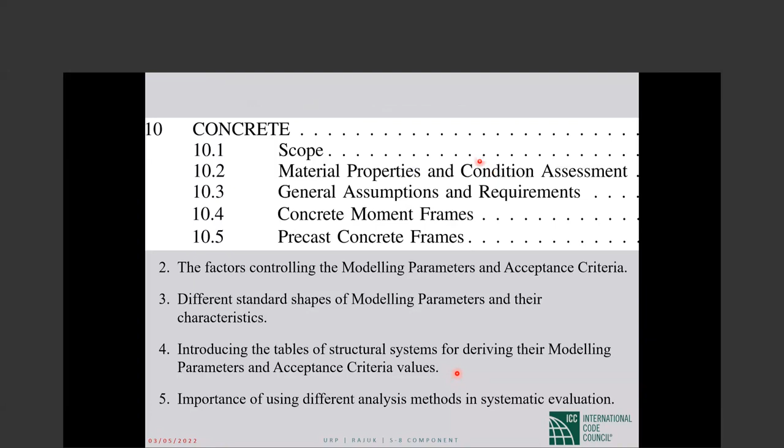Look at this systematic existing building code: performance levels, a chapter on the definition of hazard levels, a chapter on different analysis methods, linear method, nonlinear method, and then some chapters on different materials.

So all the information regarding the different systems that are made from that material is usually very nicely summarized in the chapters related to that material.

For example, for concrete, and the same for almost all materials, we have the scope at the beginning, material properties and condition assessment second, general assumptions and requirements third. So these three are general things.

And then we go to the systems, which is, for example, concrete moment frame is a system, precast concrete frame is a system, concrete frames with infills are a system, concrete structural walls and precast concrete structural walls, concrete braced frames, and then some elements: cast-in-place concrete diaphragms, precast concrete diaphragms, and concrete foundation.

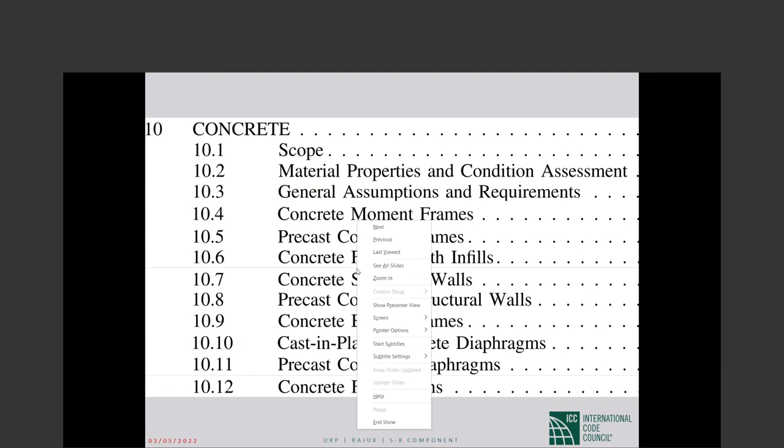Therefore, as a sample, we look at the structure of the concrete section. In the first part, the scope part, it naturally tells us some general statements about the area that is covered by this section, by this chapter.

For example, it cautions us that this chapter is not for damaged reinforced concrete buildings in an earthquake. So it's for existing buildings that have not experienced, or have very small, but not lots of, damage from earthquake.

If we want to evaluate a damaged building, the procedure should be somehow different. So in scope, it emphasizes in what conditions we can use the requirements of this chapter for our existing building.

Then there is the second part in each chapter: the material properties and condition assessment, which is really the most important, the most difficult, the most time-consuming part in each retrofitting and evaluation project—finding the material properties and condition assessment of the building to find the configuration of the elements and the materials.

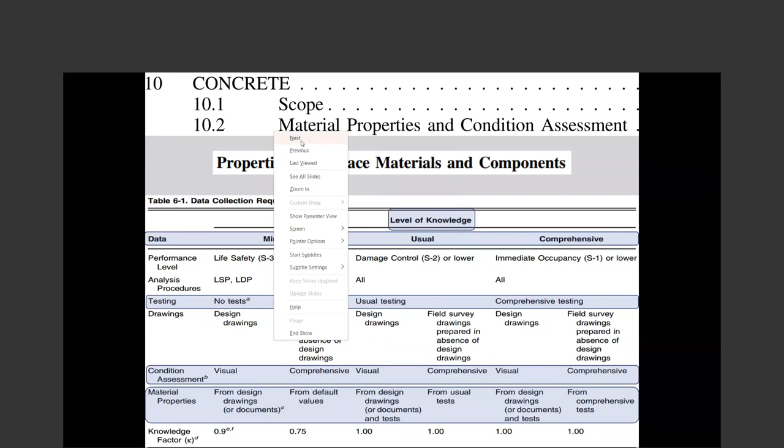And in many of the existing building codes, there are also some default values that whenever you can use that option of not doing the test, you can use those values. But the only point is...

In systematic evaluation of buildings, we need two numbers for the strength of the material, F prime C, Fy. We need two numbers: one is the expected value, one is the lower bound. Because when we want to use the material properties to calculate the strength of force-controlled elements, we are a little conservative, so we use lower bound. When we want to calculate the strength of deformation-controlled forces, because it's less scary, we use the expected value, mean value.

Lower bound is mean minus one standard deviation. Therefore, because sometimes the codes let us use the values in existing drawings or documents, they should give us a factor so that we use those numbers as lower bound and increase them by this factor to get the expected values. So, for example, for concrete compressive strength, if they let us use the value in the documents as a lower bound,

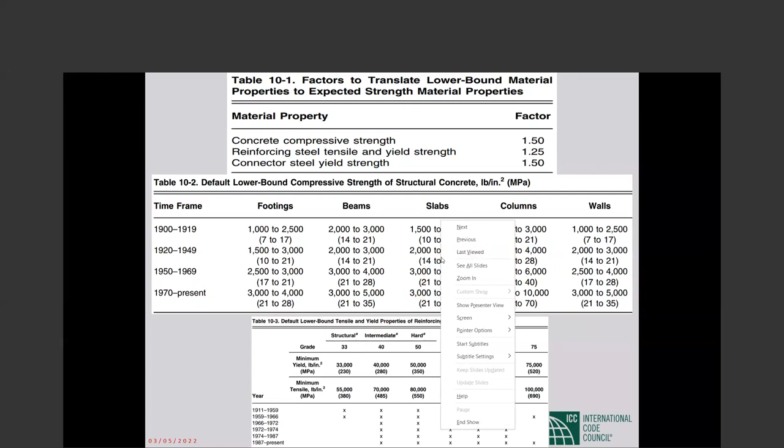Material is very important. Also, the condition, configuration, and dimension of elements are very important, because otherwise we are not sure that the computer model we have is correct. Therefore, it's important that we check the dimensions of the beams and columns, visually check the condition of the concrete, is it good or not, and using non-destructive testing find out the location of the reinforcement. Especially if we have some drawings, we can cross-check with the non-destructive checking in the site.

And if we don't have some of these points where the non-destructive testing is being done, then we uncover the element and see if the accuracy of the work is good enough or not.

Usually on site, the importance of an experienced operator is much more important than the equipment they are using. Sometimes an experienced operator with old equipment does very good estimation, but a less experienced operator with very nice, up-to-date equipment gives you wrong information. So checking them by uncovering some places is very important.

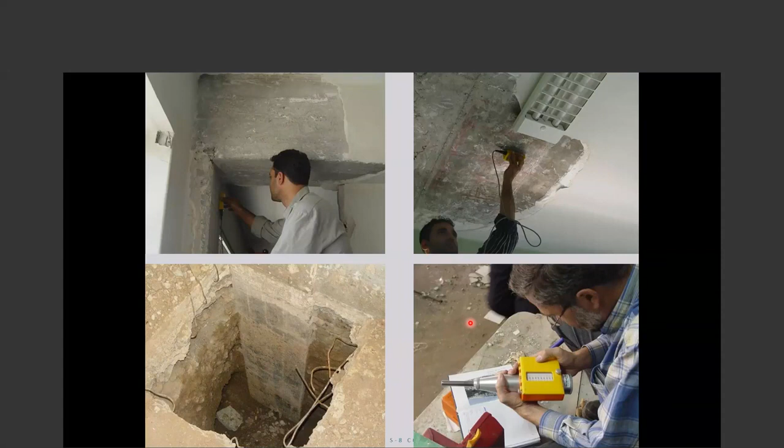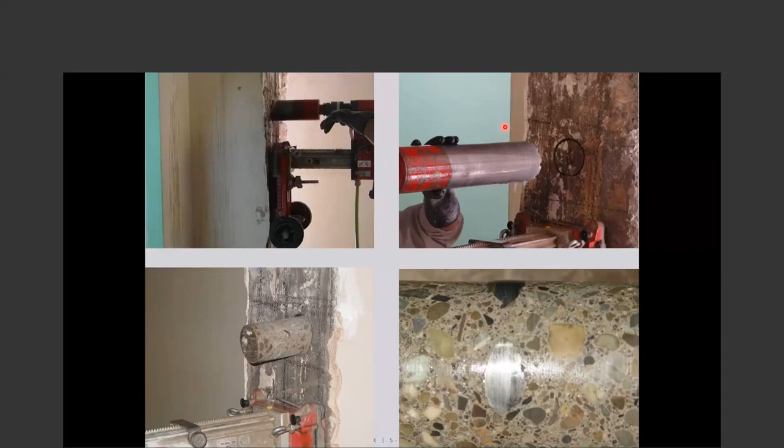For strength, concrete core and coupon, destructive and semi-destructive tests are widely used for estimation of concrete strength, as you know. And as you can see, it's really a messy operation.

So it's very important that if we do destructive tests, if we damage the building, if we cause much disturbance for the occupants, at least the results should be useful. Therefore, if the equipment is vibrating or the cutter blade is not sharp enough, the sample gets lots of small cracks. They're not visible, but it gets lots of cracks.

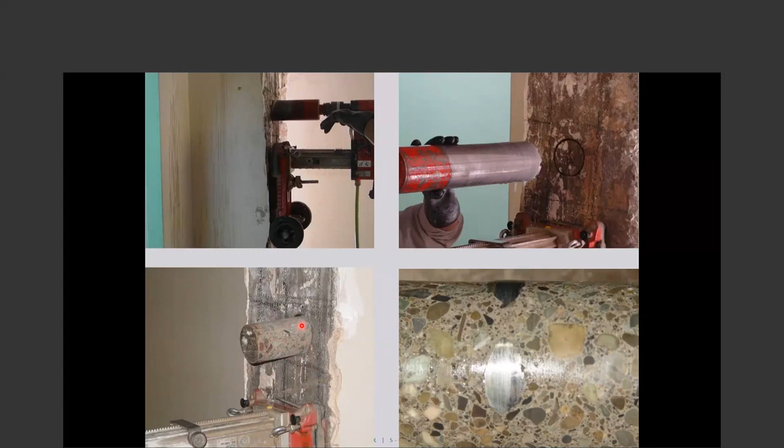When we test this, we get lower values for the concrete, and we use these lower values in our structural and building model, making the building appear vulnerable, which may not be the case, because the way we derived the material properties was not good, and the real strength is much more than what we get. So after all this effort and permission arrangement, the result is misleading instead of helping us give a good estimation of the condition of the building.

So it's very important that the testing procedures be done properly. We do enough ferro scanning and carefully locate the reinforcement so as not to damage it, but anyhow, sometimes it will get damaged, so for both the holes and the damaged reinforcement we should repair them.

Anyhow, the most important, time-consuming, and costly operation in systematic evaluation is the field work related to estimating the condition of elements and material testing. So we should be very careful to do these procedures carefully and get good results. Otherwise, it's just a waste of time and money.

Usually we very quickly pass the data collection, but in reality, data collection is the most difficult one, the most time-consuming one. Part of a systematic evaluation is this data collection.

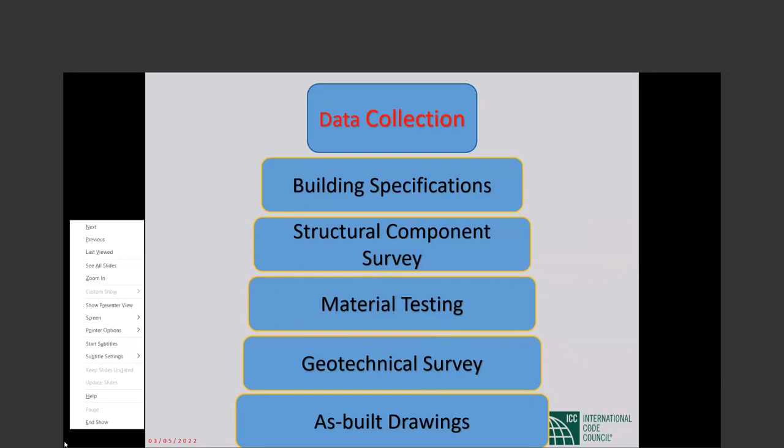When we did all these based on that table that I showed, we will find out the value of the knowledge factor. And the knowledge factor value will be applied only to the existing material properties, not to the new materials.

So when we evaluate a building, if we add some elements during the retrofitting stage, those are new material, and the original material in the elements of the building are existing material. So when we model the building, the original building plus the newly added elements, we should remember that kappa, the knowledge factor, will be applied based on whether we use nonlinear or linear procedures, in the strength or deformation capacity of the existing material.

For example, in linear procedures we're dealing with forces. Even the deformation control linear method can give us plastic deformation. So for deformation control and force control, for the existing material it is either expected or lower bound. Expected means mean value, lower bound means mean minus one standard deviation.

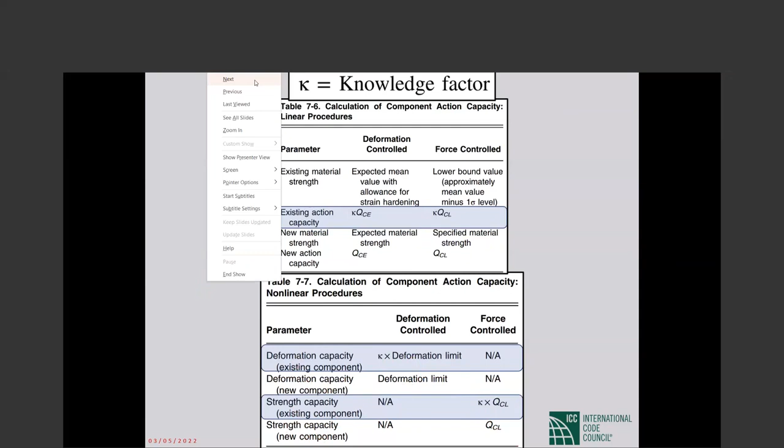Now you are looking at the structure of the chapter contents. In scope, it tells us when we can use the requirements in this chapter - it's not for damaged buildings, it's for existing buildings. Part 2 is the most important part. We quickly pass it, but in reality, in the project, it is the most important part.

In the last part of the general requirements, because after these general requirements we go to the systems and to the elements, we are looking at some requirements that can be used in most of the systems and most of the elements. So we bring them out and talk about them once, to reduce the number of repetitions.

For example, the table for effective stiffness - because concrete elements, even in their linear range, get cracked and their stiffness changes, so we use effective stiffness. We don't assume that this part is nonlinear. In reality it's nonlinear, but for concrete elements we call it nonlinear behavior only when the longitudinal reinforcement yields past the yield limit, not when the concrete before the reinforcement gets cracked.

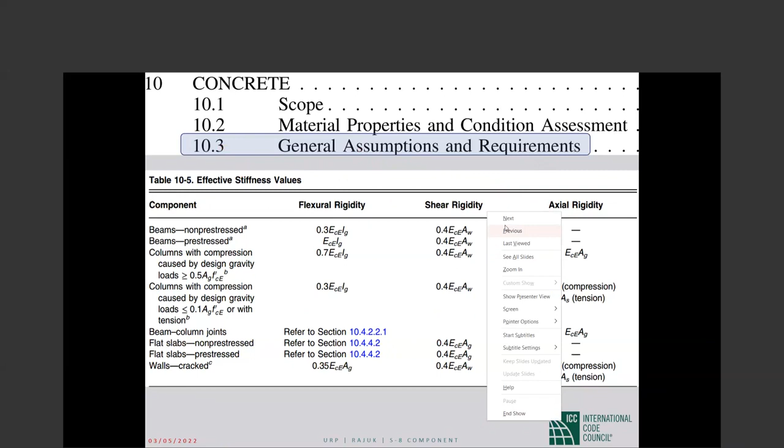Another very important thing given here is the effect of deficiencies, one of the most important topics in the general assumptions and requirements: some deficiencies, and how we should model them. In a new building, if the hook bars, lap splice bars, or straight bars don't meet the development requirements, they should be demolished.

We should build a good element with proper straight bars, hook bars, and lap splice that meet code requirements. But for existing buildings, all of them have problems, so we should model them and bring them into the modeling. Consider, for example, this deficiency: in our existing buildings, the straight bars' lap splice is not enough, and the hook bars are not the shape that is needed.

So what we should do, for example, is modify the yield reinforcement. If instead of the required development length you have a lesser development length, we apply this ratio, not linearly. In the first version of this code it was linear, but later, with more data, they modified it with this type of equation.

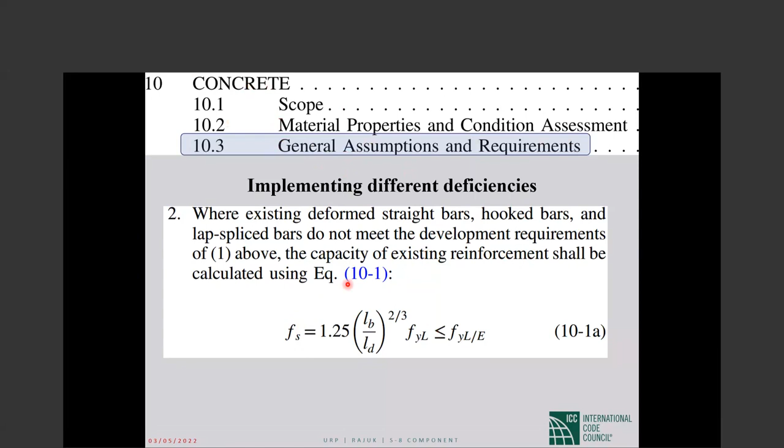So based on what we have versus what we should have, how far we are from the optimum approach, we reduce the value of the yield. In the general assumption and requirements of the material sections, they teach us how to include this specific deficiency in the material, how you include it in the modeling.

Therefore, we will see this effect later in the tables, for example, beams controlled by inadequate development or splicing along the span.

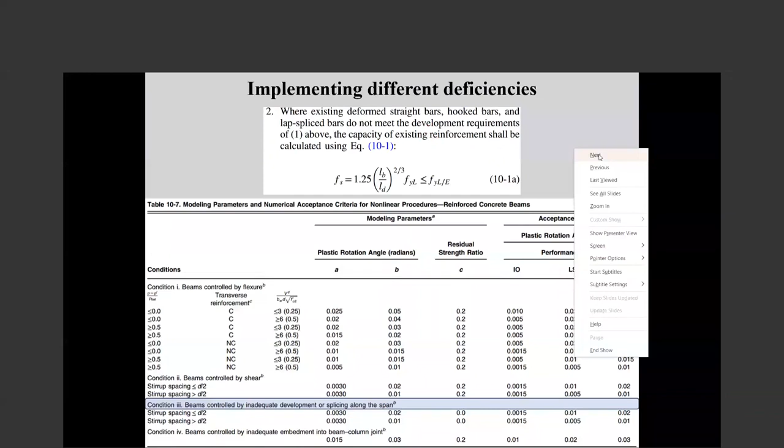What else do we have in this part related to deficiency? Still we are in section 10.3, general assumptions and requirements. In that part, I've selected a few topics to give you the general information provided there.

They try to give us some means, some tools to differentiate between critical and less critical parameters. As I said, we are in the comprehensive evaluation, so we want our approach to become more complex; we are introducing a new index. We want to differentiate between two points, because if we assume these two are the same, we should use the lower value for both, and that becomes an overestimate.

We want, as much as possible, to differentiate, to make it more difficult, to make the retrofitting cheaper. We make the modeling and analysis more difficult for the structural engineer dealing with the systematic retrofitting, but we make the cost of retrofitting and the disturbance of applying retrofitting as small as possible.

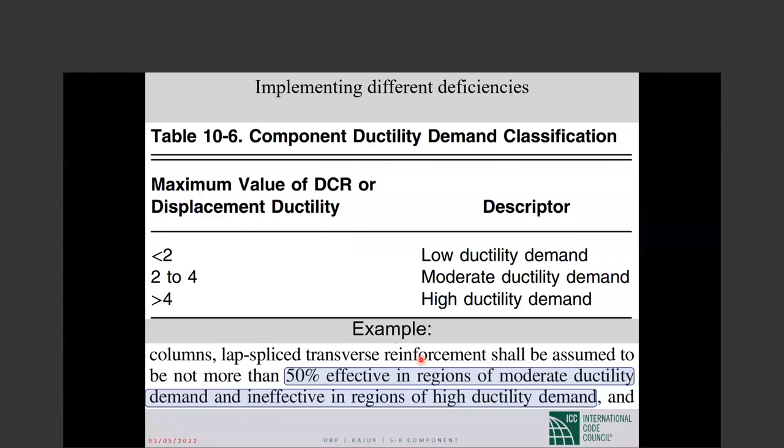It makes life difficult for a structural engineer, but for the owner, he or she will be happy, because we save money, and money is not in the modeling and calculation.

The money is in the price and cost of retrofitting, the time that we disturb a hospital to apply the retrofitting. And sometimes we see that a section of the hospital should be closed for example for 1 year to apply the retrofitting.

This is the only section that treats this kind of patient in the whole region. So it's not important that our work as a structural engineer increases in systematic retrofitting. It is important that the value of the retrofitting decreases.

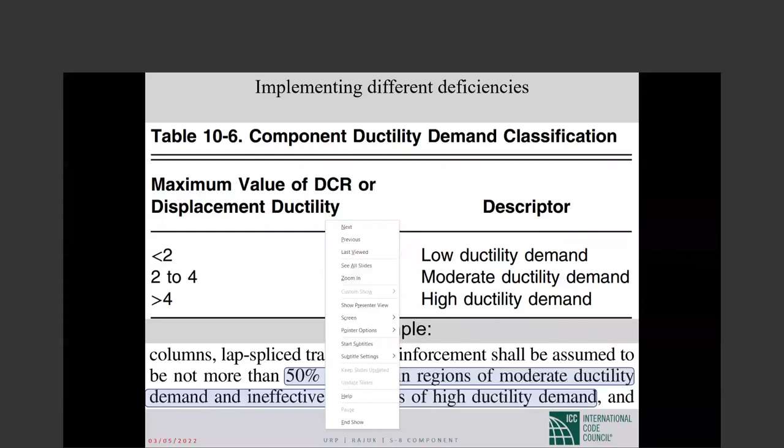What else? So we have some general items at the beginning, like scope, material, general assumptions. Then we have the systems, and then we have elements.

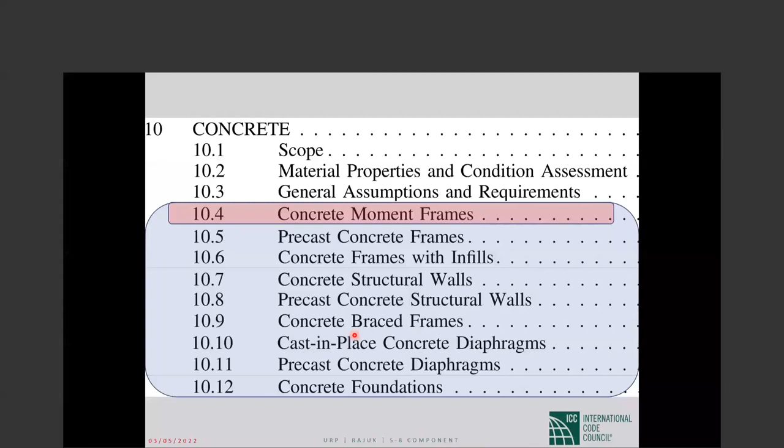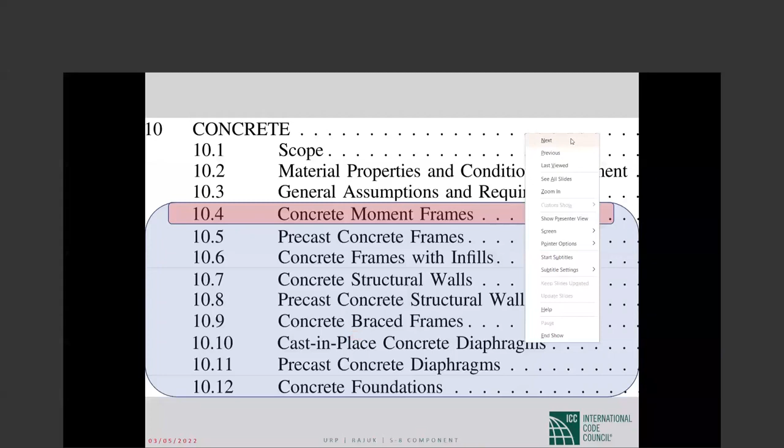For systems and elements, our approach is the same: we look at all of them and divide the situation. For example, look at this section 10.4 - concrete moment frames. If you look at this more carefully, now itself it has subsections.

So for concrete moment frames, as one of those many systems, the material is very systematically distributed in these sections. There is one section that shows the types of concrete moment frames, for example reinforced concrete beam column moment frames. Usually we consider these as moment frames, beam and column.

But sometimes there is no beam, it's just a slab column moment frame. And sometimes the beam is post-tensioned or pre-tensioned, so post-tension concrete beam column moment frames. These are the three: reinforced concrete beam column moment frame, post-tension concrete beam column moment frame, and slab column moment frame.

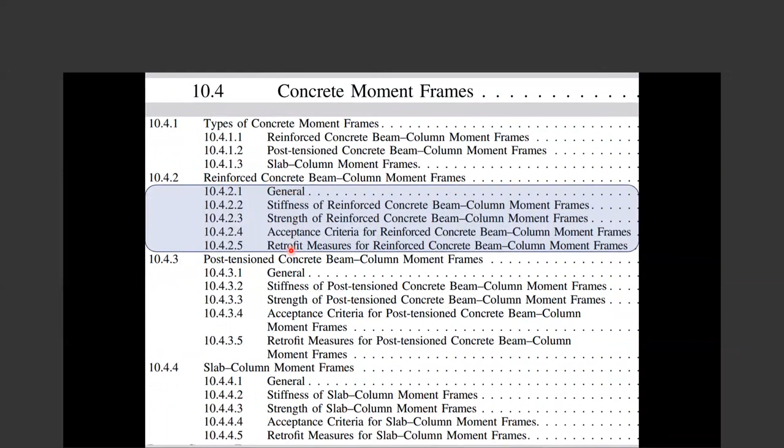Each of the systems or elements, if we look at them - for example reinforced concrete beam column moment frame - always there are 5 categories of information in this systematic existing building code. Always you can find 5, but one of them is very important, others are not that important. So we have 5 pieces of information.

First, the definition, some modeling aspects of that specific system comes in general. Then how to model stiffness - for example for a beam, should I assume shear stiffness, bending stiffness, torsion stiffness, or not? Just shear and bending is enough.

Axial stiffness - should I include the part of a slab as a beam in calculation of it? All comes here. How I calculate the strength of the beam columns if I'm doing the linear analysis and there is possibility of the weak story - how I check the strength of the story. All of this comes in this.

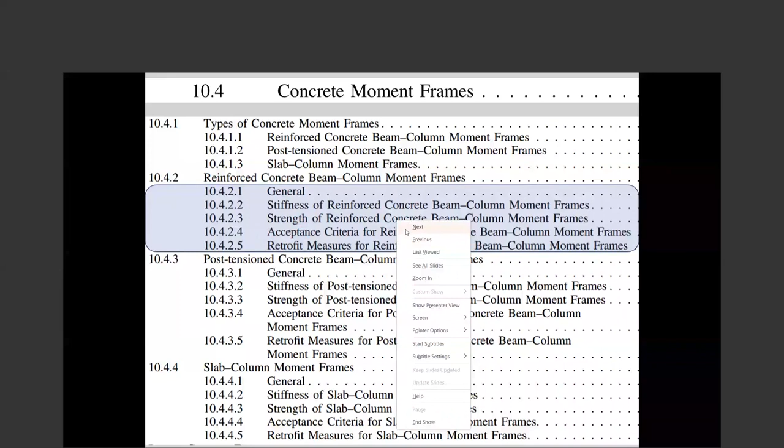And as I mentioned, the most important thing, the title of today's presentation, is the acceptance criteria and the modeling parameters, which, for example, here when you go, you have seen this table many times. That gives you everything that is needed for the modeling and acceptance. So it's a powerful tool, that now, as I mentioned, many structural engineers say we don't need any new design, we don't need a design code anymore.

We go and build whatever we want. We go and build whatever we can. So if there are some deficiencies, we model it, and then we show that it doesn't pass those performance levels. But there is strong resistance to that, because many of the experienced generation of code writers believe that we can miss many things in modeling, in calculation of the level of loads, in calculation of the behavior. There are some unreliabilities, so it's better that we use the experience.

We use the prescriptive approach, keep the prescriptive articles in the code, keep the empirical approaches, try to use them as much as possible, but complement them with those. So still, most probably we will have our prescriptive load articles in the code, at least for a while.

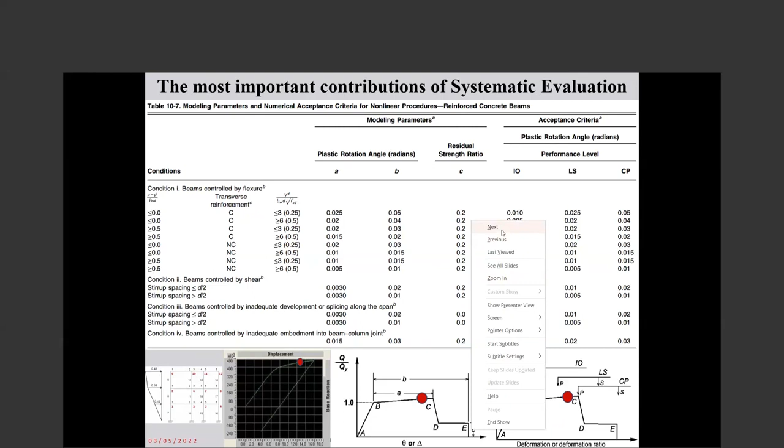Then applying in the software becomes very easy. Usually the software asks us, what are your deformation control elements? We say it is a frame.

So in beams and in the columns can get damaged. Now, is it a bracing system? So in the axial force in the braces, it can damage. The fuse, the deformation control, is the braces. Now is the eccentric brace system. So the shear in the link beam is the control parameter.

So we select the kind of points that our software should look at for damage at that point. So we select the templates, for example, this is a moment resisting frame. So in the beams, at the end of the beams is a location that can get damaged. Look at the deformation capacity, and we give the property of that.

That spring, that nonlinear behavior at the end of the beam, which is the modeling property. So if this template is applied to a beam, this is the general shape where the vertical axis is the force, the horizontal axis is the deformation, and this force is divided by a scale factor, deformation divided by a scale factor, and then this is the general shape.

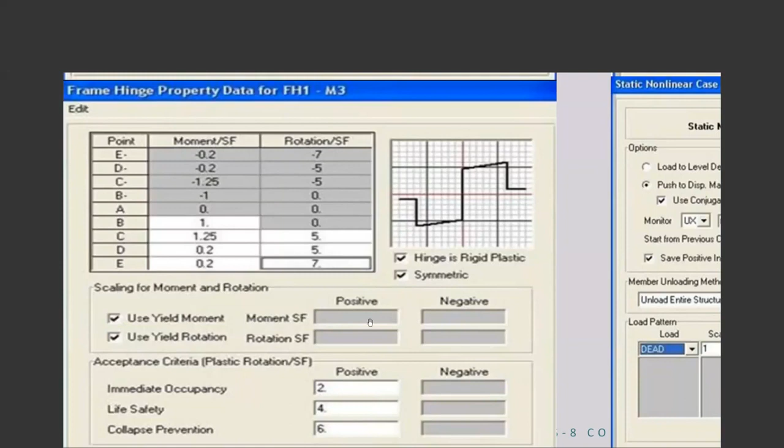So then for modeling, either we trust the software or we check and change the properties to be sure that it applies according to our tables. Then we say that we want this building to be pushed to this target displacement with this lateral load distribution, with this many steps.

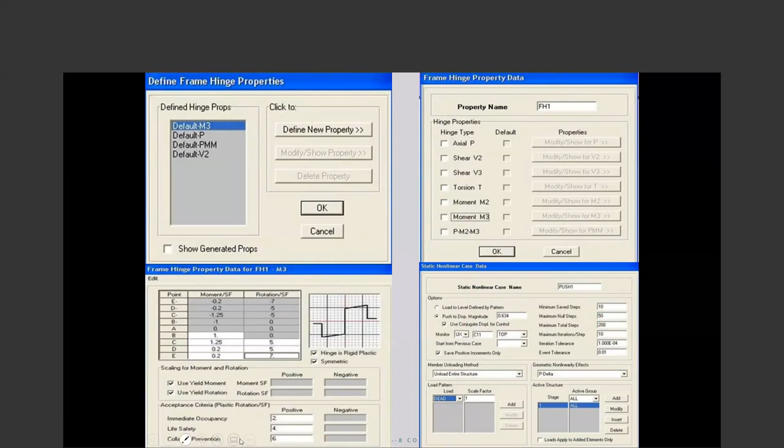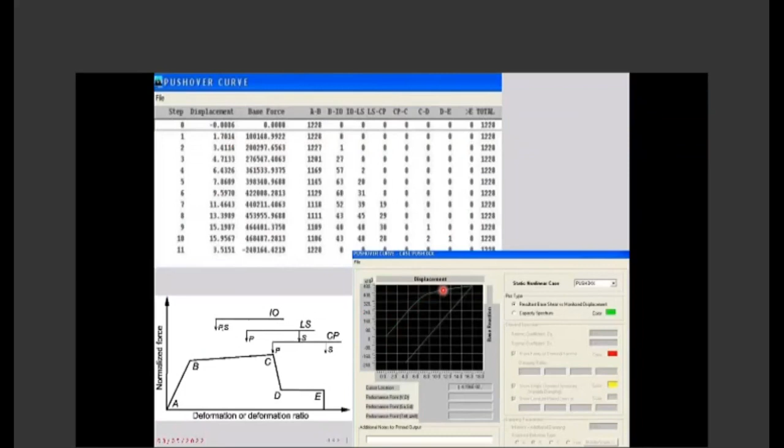If we get some problem in convergence, we increase the number of steps, so the numerical stability can be guaranteed. And as we saw, the software tries to reach the building to that target displacement that you assign. And in each step, it gives us the situation of all the deformation control parameters.

How many of them are in the linear range? How many pass a little into the nonlinear range, they pass point B, but are still not in the IO range? How many are in this range? At each stage, each target displacement is more, but for each displacement we can calculate what is the Sa that makes this much displacement.

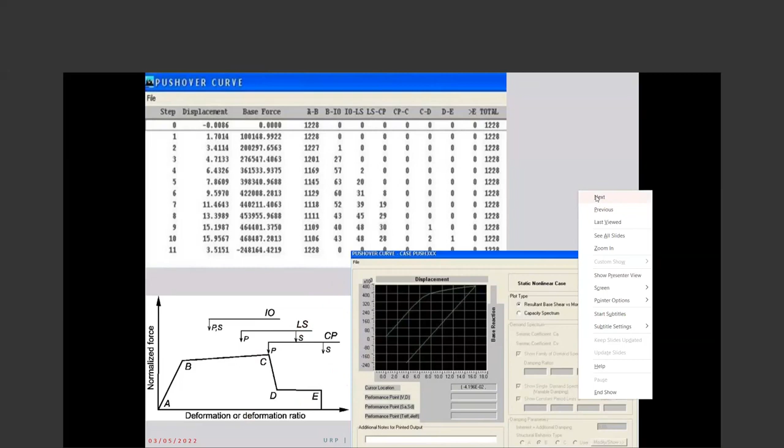So, these softwares provide a very good visual view of our design, showing the distribution of damages along the different bays. Different stories can be seen very easily over here.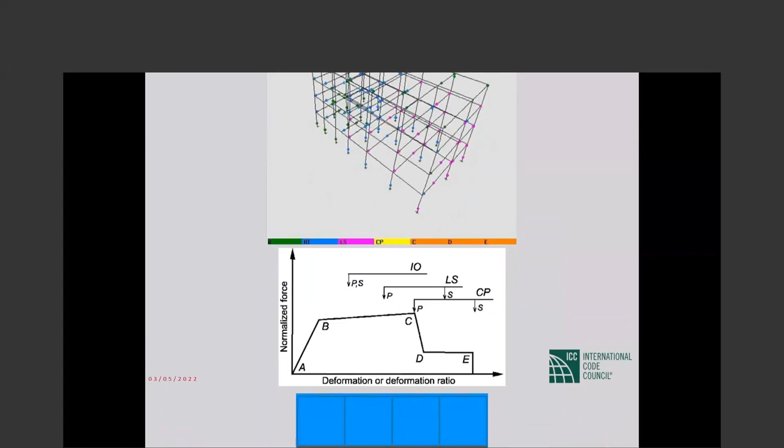Now, if we want to apply this in real life buildings, if one as a structural engineer wants to perform systematic evaluation on a building, because even in design of new buildings there are different approaches that we can use. But the principles for existing buildings are a little bit different from new buildings.

To make my point, I try to find the simplest possible example. What I mean is that we have different methods for analysis: linear static, linear dynamic, non-linear static, non-linear dynamic. So at least we have 4 types of analysis.

Usually in new buildings, when we design, we shouldn't expect that much difference between these, because we scale. If we use one approach or another, there are some scaling changes, but they are not much different. But in the evaluation of an existing building, that's very critical.

So I want to reach this point: for systematic evaluation there are lots of ways to evaluate a building, but our view for selecting a company or person to do the seismic evaluation should be quite different from the way we select a company or person to do a design for a new building. Usually in the design of new buildings, we select whoever asks for less money, because the procedure to be followed is almost straightforward and easier. But for existing buildings, it's quite different.

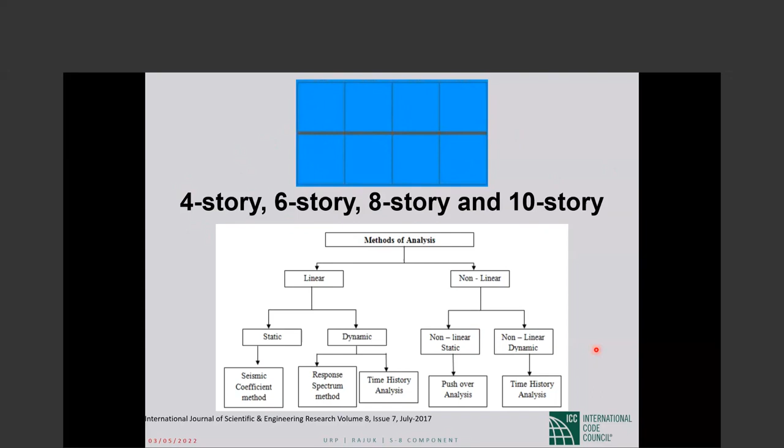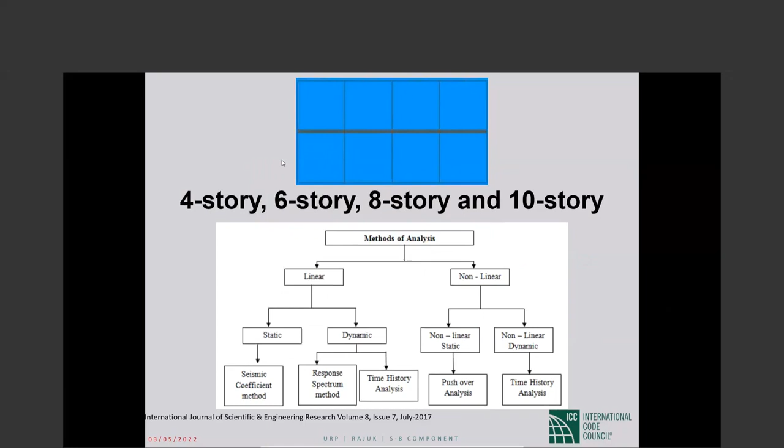And to make life easier, just look at the result. Many times results like this show up from this example: beams and columns, number of elements in need of retrofit. We use one method and it says 50% of the beams need retrofit.

Half of the beams. We change the method, and it says 25%. We change the method again, and it's 0. 50%, 0.

So the first lesson that we learned is that in seismic retrofitting for a specific building — because if you apply seismic retrofitting to a group of buildings, you should make a methodology and use that for all of them — but for one specific building, you should try all the available analysis methods. Because one of them tells you that 70% of the beams need retrofitting, and another says 0.

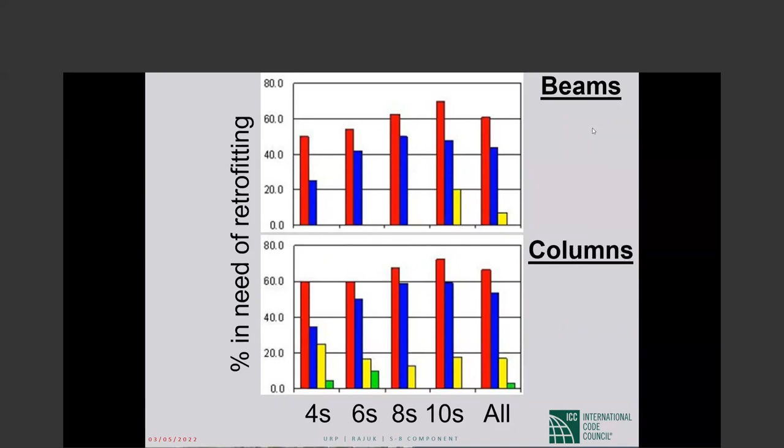This is the case of seismic evaluation and retrofitting of a 56-story building complex in Tehran, Iran. At the time it was under seismic evaluation, it was the largest evaluation project in history and in the world—I don't know if that status has changed since. It's around more than 15 years ago, but at the time it was the largest retrofitting project in the world. A 56-story building with a long story, that's why it went through the retrofitting.

So, here, the same story again.

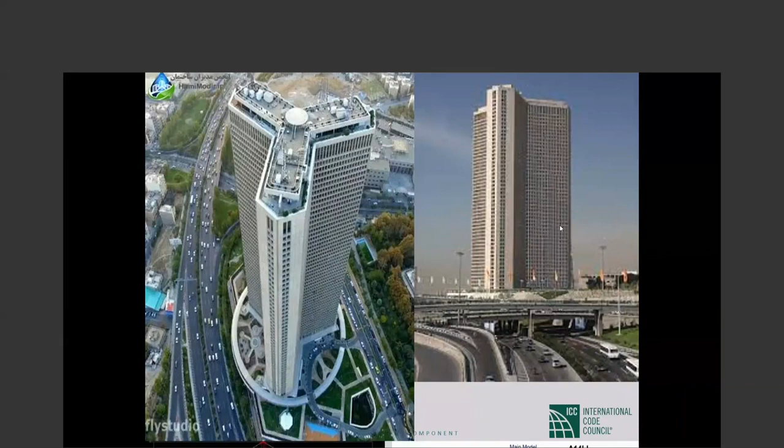If we look at the results of the linear analysis for these kinds of buildings, like a star shape, they are very nice buildings because the ratio of the perimeter to the area is more than other shapes, so the apartments have lots of view on the perimeter. But from the structural point of view, because the main walls intersect here, they have a little problem with torsion, where these lateral walls of apartments should resist that torsion.

Anyhow, if we go with linear analysis, sometimes static, sometimes dynamic, it's not always the same one that gives the least overestimation—it's different, but many times the nonlinear ones are a better estimation. So with some form of calculations, almost 20 stories of the first 20, most of these walls in this huge building should be retrofitted—20 stories, almost all the walls should be retrofitted.

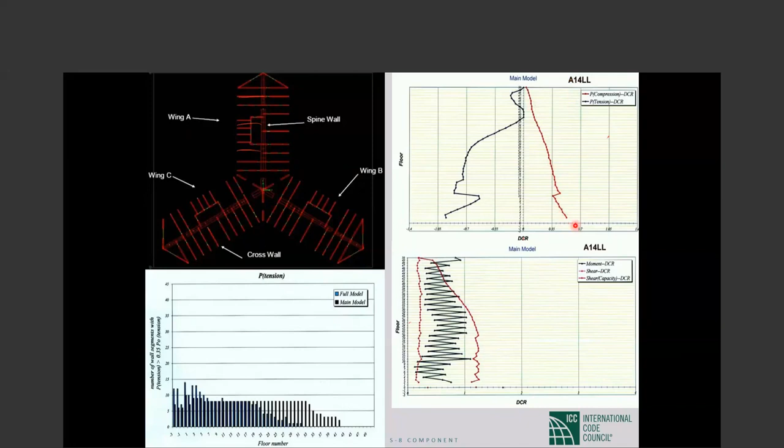Assume everything more than this needs retrofitting. For example, this wall in wing A, from this floor to this floor, almost floor 20-something, 26, 27, needs retrofitting.

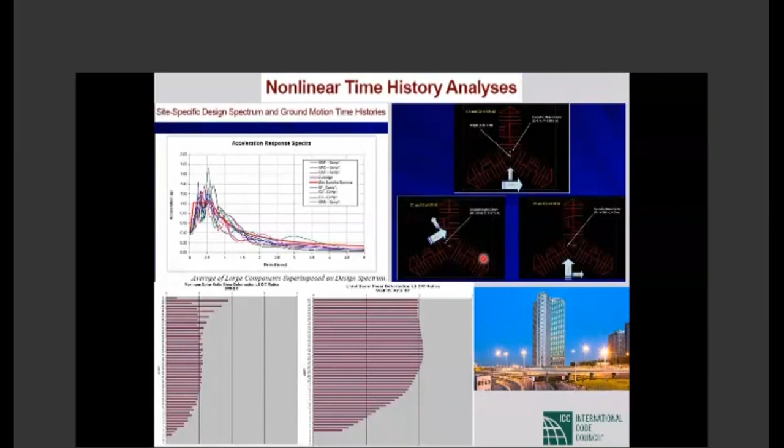I think that's maybe the first real building that used RAM Perform for a project—I think it was this building. You know, the Perform software is now CSI Perform, but when it first came out, when Professor Powell of Berkeley retired and worked with the RAM company to produce Perform, the software was used for the analysis with lots of problems, needing some solving to get it to run—lots of problems, lots of difficulty.

But what's important is that in the end, only some of the lintels needed retrofitting for this huge 56-story building, instead of 20 to 25 stories where almost all the walls should be retrofitted—huge work. A couple of, a few of the lintels in the main walls, their beams, those lintels, they needed to be retrofitted, which was easily done.

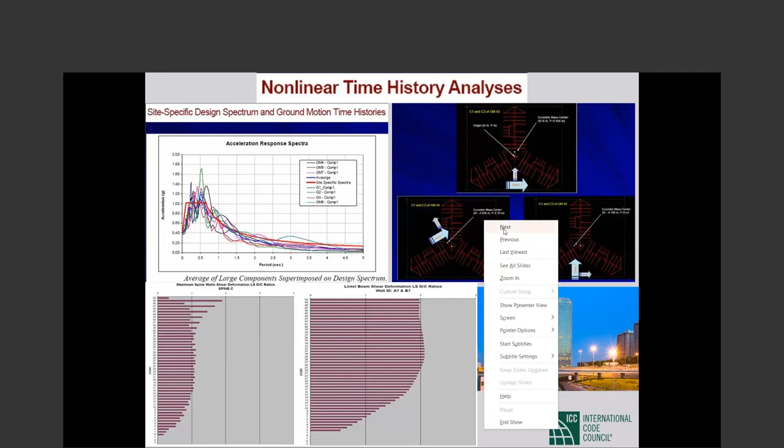So if we look at what we covered in these four sessions in this course, we covered only some concepts regarding systematic seismic evaluation of existing buildings. This area is very vast, very large. It has seismic evaluation, seismic retrofitting, technique selection and detailing—we didn't say anything about technique selection and detailing.

Even in seismic evaluation, there are methods based on fragility vulnerability function, visual screening, rapid vulnerability, preliminary assessment—we talked about some concepts regarding detailed engineering and systematic evaluation, but there is much more. So we should know that we focused on some concepts because mainly it was important for us to differentiate between our approaches to new buildings versus existing buildings.

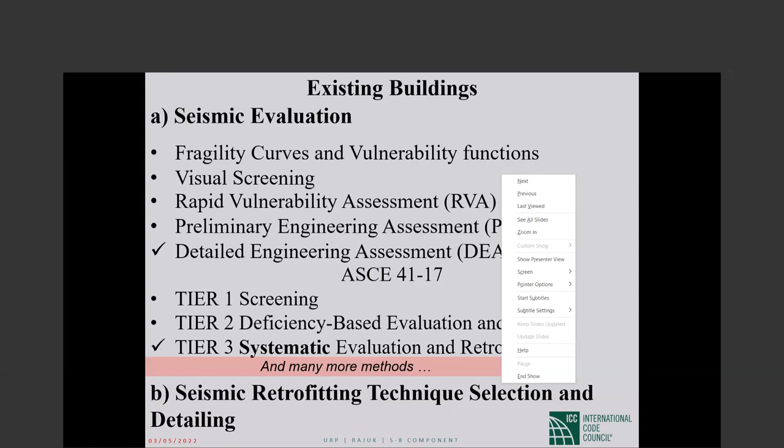But there are lots of good references, lots of good books. For example, I mainly used this as a base; there are many other good references that can be used, even in ASCE 41. Now every chapter for materials is getting separated into codes by the relevant corresponding code committees—for example, ACI has the assessment, repair, and rehabilitation of existing concrete structures, and AISC has the assessment, repair, and rehabilitation of steel structures, so it's becoming even more technical.

And for the examples that some of our dear colleagues were asking for, there are again many good ones—I selected this one because it's free and easy to download: the examples guide for ASCE 41, a previous version, but with additional commentary for ASCE 41-17, and the version based on 17 seems to be coming out soon. So there are very good codes, many good ones from different countries—I didn't include ones from New Zealand, Japan, Australia, or the Euro code.

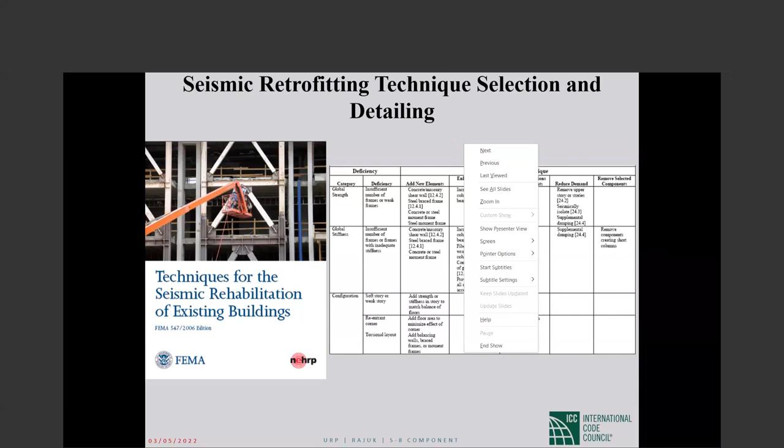So when it comes to seismic retrofitting technique selection and detailing, there are very good guides available as a catalog that we go through when we find out what the problem of the building is, and try to solve the problem.

So, as I mentioned, compared to new design, the evaluation and retrofitting of existing buildings is more complex because it's not straightforward. There are many ways.

If in any way we can come to this area, it is accepted. So you can increase the stiffness and the strength. Then, because of that, your target displacement after yielding reduces. So with increasing strength and stiffness, you can reach safety.

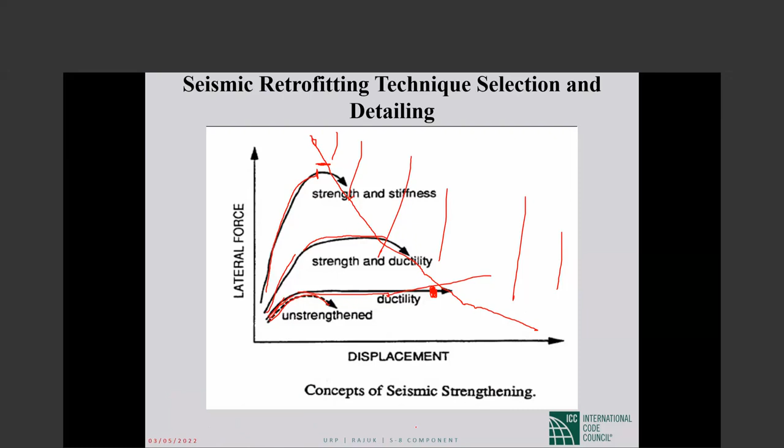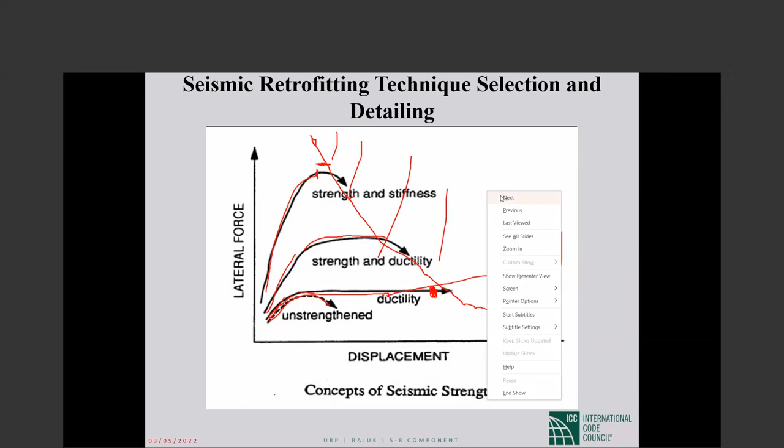So, for example, in that case, say assume it's a hospital. For a hospital, there is a problem here: this existing structure can't reach the target displacement.

So either we increase the strength and stiffness by adding these new elements, and then reducing the target displacement. Now even that vulnerable element doesn't need to reach this level of displacement, and at this level of displacement, it is okay. Or just that vulnerable element.

We don't increase the strength, we don't increase the stiffness of that, just see what happens. Why has it reduced ductility? So, for example, we need to increase it by adding some cover of concrete, steel coverage, or FRP coverage just to enhance the stress-strain curve of the concrete and increase the ductility capacity of the section, so it reaches the target displacement.

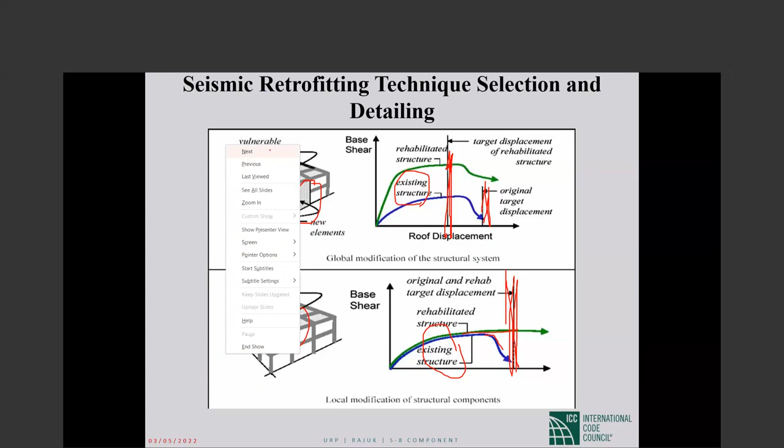Then for the selection of systems, many of these approaches, based on experience, as I mentioned in the commentary part, give some recommendations. For example, many times retrofitting from outside is easier. In these cases, you can see that a bracing system is added to the perimeter of these buildings. In some of the faces it is less, some complete, or just some support from outside.

We know that some systems such as BRB, buckling restrained braces, are very good and easy in a way, because the bracing system itself is very good, no problem with bracing. The point is in tension it is very good, but in compression it buckles. So if we didn't have this buckling, if it was buckling restrained, it was very good. So you just put an element, and this element cover keeps the brace from buckling.

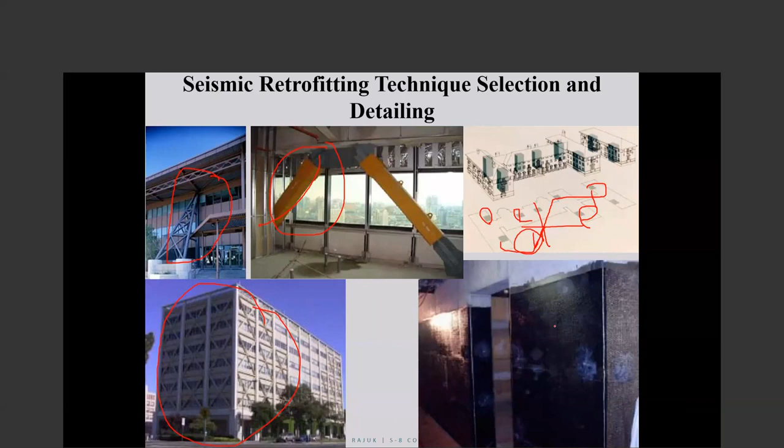And for the local problems in the elements, usually techniques such as using FRP now are very good, but should be used very carefully, because in many cases, due to workmanship or the material used, there are problems. For example, a very important hospital spent lots of money applying the FRP, but around one year after the application, when you go check the locations, many places the FRP has separated from the concrete. So the detailing is very important.

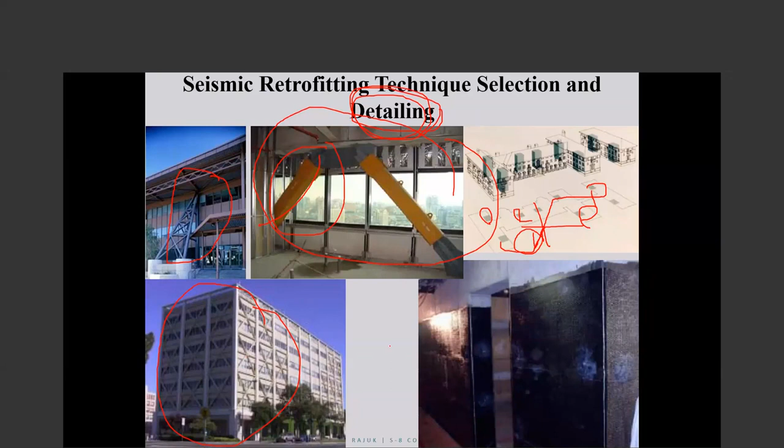The detailing matters once you select the general system. The detailing is as important as the system itself. And the detailing in all the systems, complex and simple, in retrofitting, is important because, for example, you want to retrofit from outside.

Either by adding bracing outside, or adding shear walls, or adding frames to the outside of the buildings, many times because only the outside is retrofitted, the diaphragm should bring the force to these elements on the outside, so it's better to be a rigid diaphragm. Because if it's a flexible diaphragm, the internal elements that are not retrofitted will also, depending on the mass distribution of the diaphragm, get lots of load too. So it's better to be rigid, and detailing is important for the building after retrofitting to behave the way we are assuming.

We assume that the load comes to these elements at the perimeter, so enough good detailing is needed to make the diaphragm rigid, so the diaphragm can safely transfer all the loads to these elements at the perimeter.

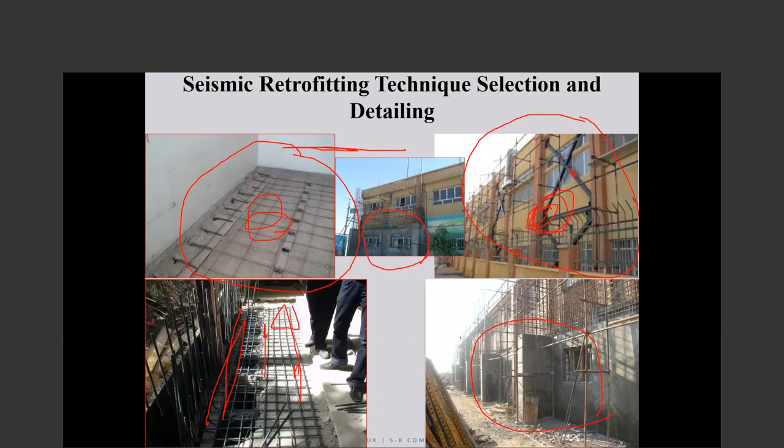For example, if the connection between the new shear wall and the diaphragm is not good enough, then the load from the diaphragm cannot transfer to the shear wall. We assume we design the shear wall to get a good share of the force, but in reality, because of bad detailing, the load can't transfer. For example, damage happens in the slab because of the small thickness that the slab has. Therefore, detailing is very important, and after selecting the approach—whether we want to use shear walls or bracing—designing the details so that the retrofitting technique behaves with the original building in a way that you assume in your modeling is a very important matter.

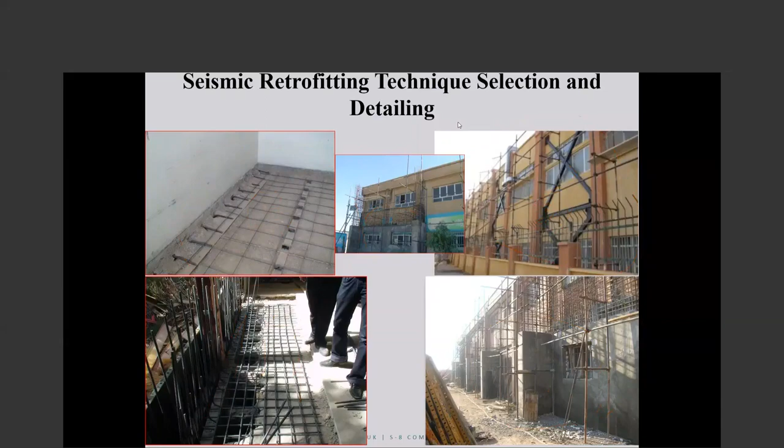If we want to review the items in today's talk, because a test is coming up after the course, one of the important things was systematic assessment and retrofitting. What was the main contribution? Is it, for example, introducing new retrofitting techniques, advanced techniques, FRP, shape memory alloys, base isolation, new forms of damping, repairable systems, many new ideas? No. The most important aspect of systematic assessment and retrofitting is introducing modeling parameters and acceptance criteria so that we can model each building with whatever deficiencies it has and check its performance. These modeling parameters and acceptance criteria are the very important contribution of this generation of systematic evaluation of existing buildings.

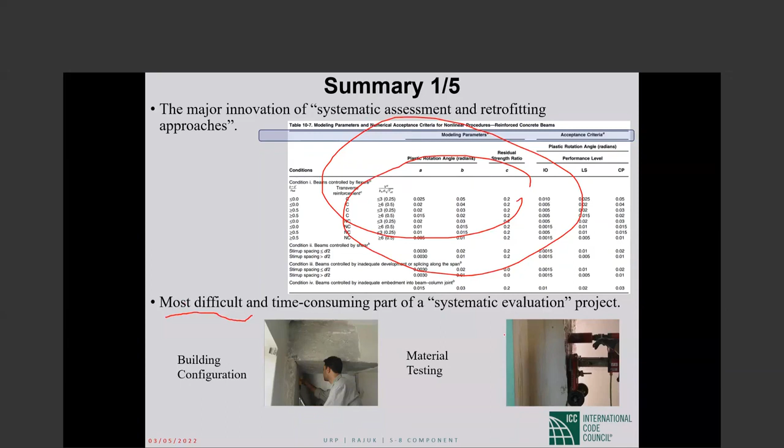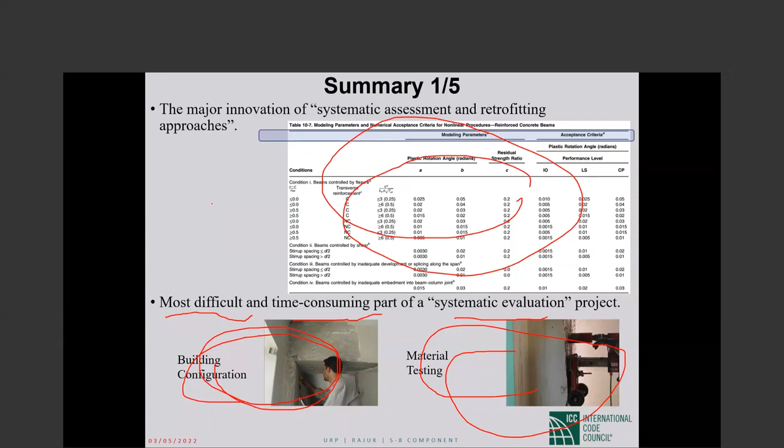What part of the systematic evaluation is more difficult and time consuming is finding the building configuration and testing, finding the material properties and characteristics. So if, from now on, at least for our new buildings, we can make good documentation—the authorities can make sure that all detailed drawings are as built—it will be a big help later when we want to evaluate, because new codes come, the seismicity of the city changes, a couple new faults are discovered. So the most difficult, time-consuming part is finding the building configuration and material testing. It's very, very difficult. I ask, many of you have had this experience.

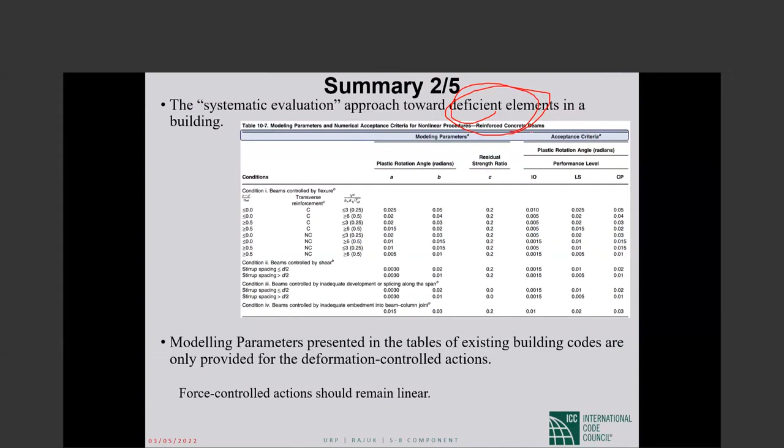What is the approach in systematic retrofitting and evaluation toward deficient areas? Because in designing and constructing a new building, our approach is very clear: you should demolish and rebuild. We don't accept any major deficiency in the building—it should be according to the design. But our approach in systematic evaluation is that we model the deficiencies. All deficiencies are modeled by modeling parameters, and their effects are considered in acceptance criteria. The acceptance criteria for, say, an inadequate development case is different from one with adequate development—maybe 1/10 or 1/5 of that. So it's quite different; the effect of deficiency is shown in modeling and in acceptance criteria.

There are modeling parameters in tables, such as the one we can see above. Why are they only for deformation control actions? Because force control actions don't need tables—they shouldn't get damaged, so there's no need for a level of damage as acceptance criteria or for modeling the nonlinear behavior. So there's no table for force control. Force control actions should remain linear.

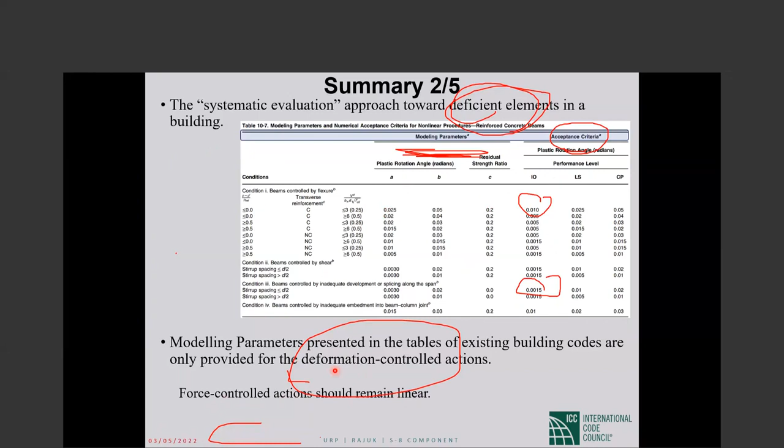If the major contribution is modeling parameters and acceptance criteria, what is a modeling parameter in simple terms? What is this A, B, C? What can we call them? This shows the modeling parameter—it shows the nonlinear capacity of a deformation control action. For example, here is bending, so the nonlinear capacity graph of bending is a modeling parameter. A, B, C shows this capacity. Demand can be small, demand can be more, demand can be different. What is capacity? The capacity until damage without deterioration, and the capacity of damage with deterioration—these are capacities.

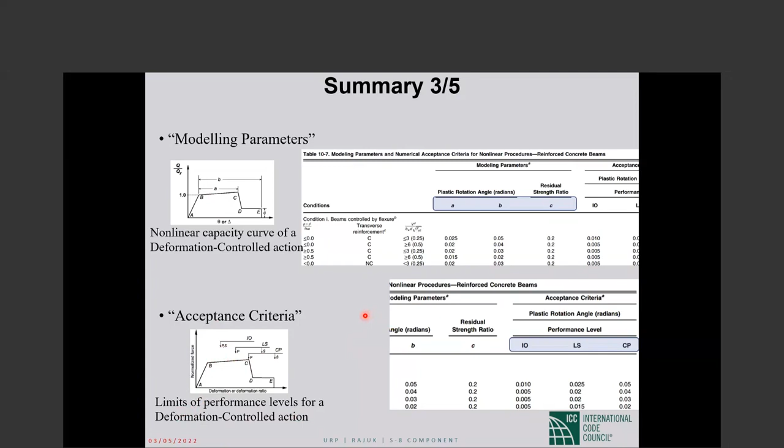What is acceptance criteria then? If this is the capacity, on this curve, the limit for performance—the limit of damage for performance, the limit of performance on the deformation control action—these are acceptance criteria. So up to this limit, this much damage is IO. How much damage is LS? How much damage is IO? How much damage is CP? That's acceptance criteria. Then, if these values are larger or smaller, what engineering sense should we have? If the modeling parameters are larger or smaller—this A value—what feeling should we get toward this deformation control parameter? If A is more, the ductile behavior is more.

If A is less, we can see that if the problems with confinement and shear and ductility are combined in such a way that ductility is less, A is less. More, it will be more. So modeling parameters give us a sense of the capacity, ductility capacity, ductile behavior of the element.

More ductile. How about acceptance criteria? If they are larger or smaller, what sense do we get there? For example, here this value, if it's more, this value more or less, what happens?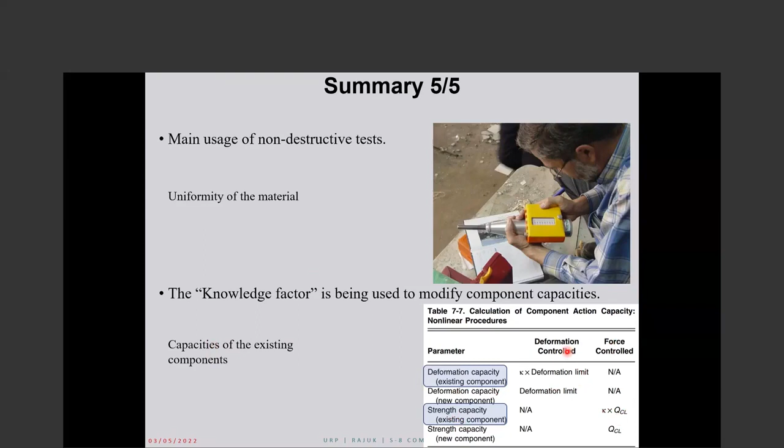Depending on whether we're using a nonlinear or linear procedure, in any case it applies on existing properties — for example, the strength of the force-controlled material in nonlinear analysis, or the deformation limit of the deformation-controlled element in nonlinear procedures.

If we look at some of the outcomes, in general the level of deficiency is somehow included in the modeling. We saw that both can change the material properties. For example, if Fy is affected when the lap splice is not enough, it also changes the modeling and the acceptance criteria. In the tables, these are provided for each system.

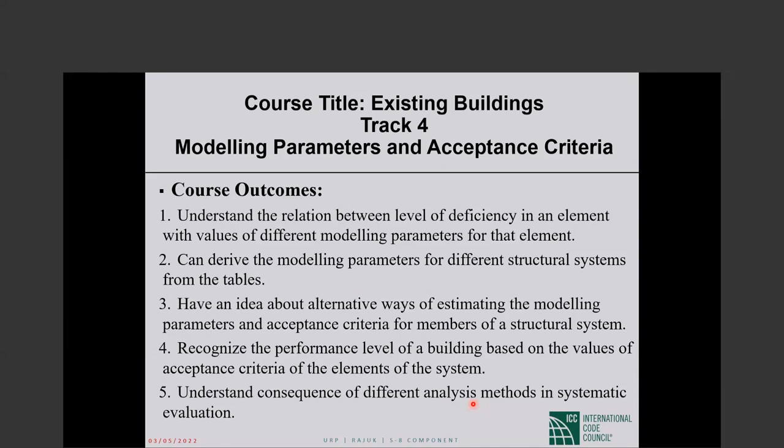And then we understand, with those simple examples of the one frame and then the larger building — at the time, the largest evaluation project in the world — that both of them show us the same thing: in systematic retrofitting, one focus should be to use as many analytical approaches as possible for that specific building we want to check for retrofitting.

And there were two other points. The other point is that in retrofitting, we try to use different retrofitting techniques. That's the second. And the third one is trying to increase the complexity of the model, for example by modeling soil, by modeling the connections.

You know that, for example, in many codes for new buildings, we have articles or appendices on soil-structure interaction. Usually in the older approaches, we change the period of the building because the soil is flexible, and increase the damping of the structure because the soil absorbs some of the vibration energy from the system.

So both of these usually cause lower base shear — generally, not always. Sometimes when we include soil-structure interaction, the deformation of the building increases, but usually the forces decrease. So usually the design base shear, when we use those articles in the code for soil-structure interaction, the design base shear decreases. It becomes more economical to design buildings including soil-structure interaction.